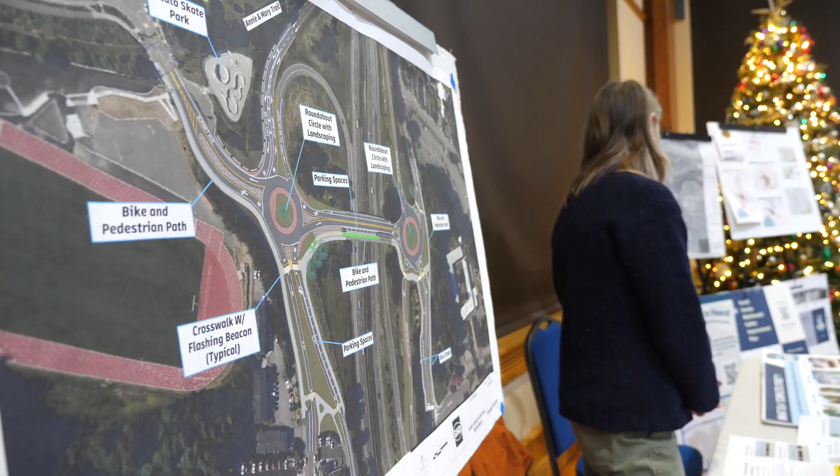So, I have a couple of quick questions. How many of you are on one of the events this week? Right, that's a really good number. And how many of you took part in the original set of walking audits? It's about 18 months ago. Wow, this is pretty amazing. I may just have you guys come up and present.

This is pretty good. We're putting together a set of presentations to build the vocabulary. We're finding that Humboldt County residents are really among the more knowledgeable. So we're starting at a higher level than we would normally think, but we want to make sure you have the right grounding, the right base. So I'm going to start a little bit just to get some thoughts flowing about why we do what we do.

And then I'm going to make it much easier for our recorder. I'm going to step back here. Is that better for you? Cool. Okay, thanks. Oh no, I'm going backward. I need to go this. You already taught me which button to push. That's half of life, is learning which button to push.

Portland is now building bridges just for transit, walking, and bicycling, no cars. It's giving direct feed into the neighborhood. It's connecting really important parts of its neighborhood, and it's resulting in some amazing numbers of people who are now not only living and working in these zones, but now just coming to enjoy the whole pleasure of being a resident of Portland.

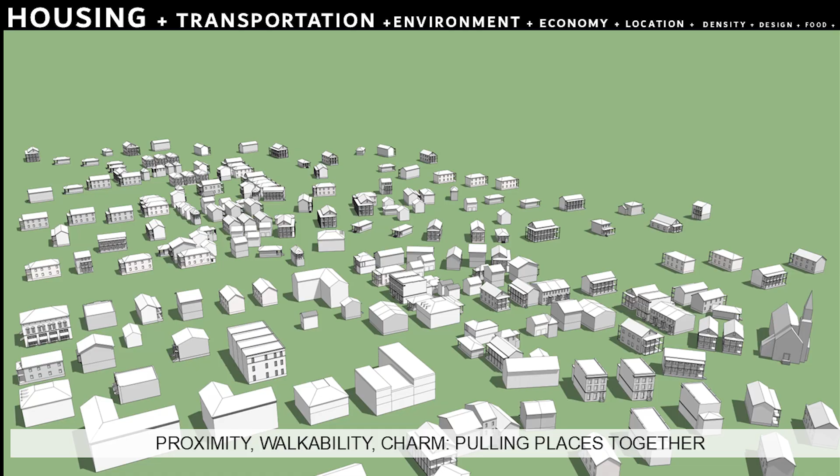And we need less of the land, we need to displace less of the forest or less of the farmland in order to accommodate population change. If we could deliberately learn to get together in communities and get those city comforts or town comforts that I was talking about, to do that, we also want to make sure we still have our privacy. We still have private outdoor open space, and we still have long views across green, things like that. That all comes from getting the design right.

The design that's most important is street design. It took me a long time to realize this, but that's why we ended up writing the book. John Massengale and I came to the conclusion that street design was the one thing we could least afford to get wrong. And yet it was the one thing most often gotten wrong in the construction of our modern built environment. And so we set out to put down all these thoughts we'd had over the previous 20 years or so about street design in this big fat book.

And we thought, well, that'll be easy. We've done this for a long time. We've thought about it. We learned from Dan Burden. We'll knock this out by Christmas. And it took us 3.5 more Christmases to get it finished.

But in the process of creating the book, we traveled all around. We went back to places we had visited before, or that we knew as students, or ones we had read about. We went to places that our colleagues and friends recommended we check out, and we measured them. We photographed them. We watched them at different times of day and different days of the week to see how they perform. And we put all that in a book.

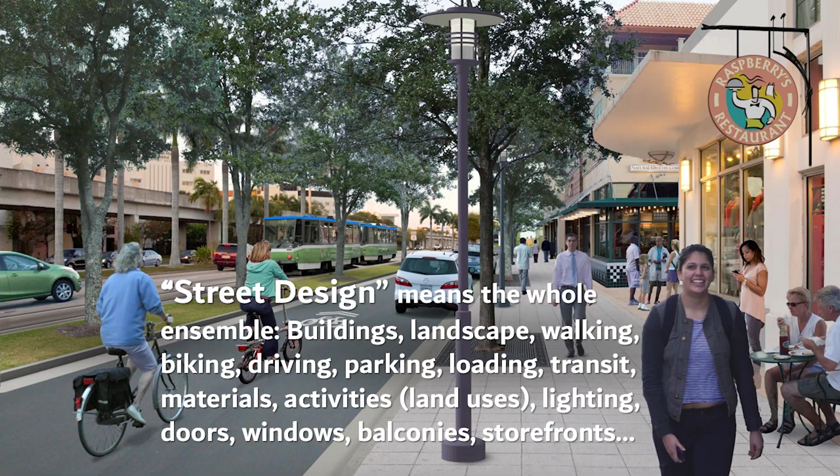Now, where do you do that? Well, actually, we have a lot of places we can do that where the spaces we've inherited seem built out. I've heard that phrase 5 times this week. Well, you know, in Humboldt County, we're largely built out. In McKinleyville, we're largely built out. In Arcata, we're a built out town. I heard it over and over and over this week.

I know this is going to sound like the crazy carpetbagger from Coral Gables coming in and dropping his opinions, but here's mine. You're not built out. In fact, much change will occur during the coming decades. In 50 years, 50% of the buildings you see on the ground will have been built within that 50 years, even if they replace ones that are already there. That's the challenge ahead of you. So you're not built out. And with all that lost space between buildings, you have room to grow and build your way out of your problems. Now, that's going to require a bigger menu of street types.

For a long time, traffic engineers were trained to believe in only 3 categories of streets. Local, collector, and arterial. Arterial, collector, local, ACL, sounds like a knee injury, right? And then of course 2 contexts. As the book famously said for 50 years, rural, by which they meant suburban, and urbanizing, by which they also meant suburban. Sorry, only really one context. And so when they applied those rule books to the arterials and collectors and locals, this is the kind of space they created in front of your house, or your neighborhood, or your commerce. All of it designed with the idea that wider and faster roads were better roads, which was wrong.

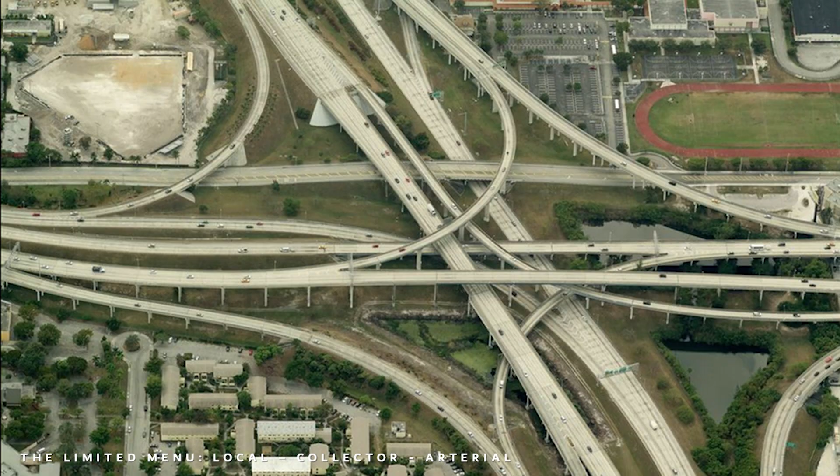And here's the key to it. Now this is a bumper sticker, so you can remember this. LU1, TR2. Learned this from Rick Hall, one of our colleagues, and the Dean of Modern American Traffic Engineers. Rick says, a community should do its land use and establish its vision, think about its urban design pattern. In other words, determine what it wants to be when it grows up. And then design the transportation facilities to fit that vision, not the other way around.

What's happened all over the Sun Belt during the last 60 years or so is that we've been just designing the transportation systems first, however traumatically, with the disruption that comes from road widenings and highway building, crashing through historic neighborhoods with interstates and all the things that you've seen.

And then wait for the communities to figure out how to adapt around them. That's been the world we've lived in. Now, how can they get away with that? It's because transportation actually is where the money is. Of course, the motoring public wants its leaders to get things done. You know, something ought to be done about road X or road Y. And so something usually is. Unfortunately, they're not always improvements, even though they always use the word improvement to describe them.

Now, because they have the money, when we're planning, we should really let land use and urban design lead and let transportation follow. But when we're implementing, we need to use that treasury to let transportation lead on implementation. But if you do it in the opposite order, if you start with the idea that everybody's going to make a trip in a car by themselves every time, every day, for everything, then don't be surprised when you end up with a place you don't love as much.

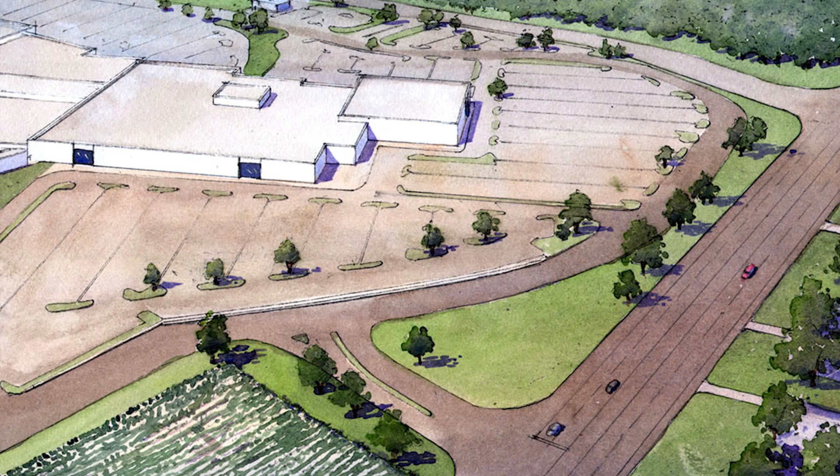We can also use this approach toward retrofitting suburbia, changing the places that are graying out, like the old shopping centers as they're aging none too gracefully, and we need to think about how they might be replaced.

That actually is one of our best sources of room to accommodate growth as it occurs, however slowly or rapidly. Recapturing the lost space. We can add housing variety, we can still have retailing, maybe not quite as much. We can make workplaces and good places to work from home because you can walk down the street to that coffee shop.

Now, streets sending messages do a lot of powerful things. They tell you where you are. This is Pacific Grove, down in Monterey County. And if you stand on that street in Pacific Grove and you look west, your brain just tells you that where the sky comes all the way down to the railing, that's the ocean. You can't see the water there, but you know that's the overlook of the ocean. So even if you live several blocks from the water's edge, you are connected to it. You feel connected to the ocean in Pacific Grove.

Streets tell us when we are. You step out of a building like the one we're in, the street greets you, gives you information. What time of day it is, what time of the year it is, and streets change in order to send you those messages. And of course, they send you messages about the institutions. This is in Yellow Springs, Ohio. What's this? A terminated vista. Right? Okay. Horace Mann built that building.

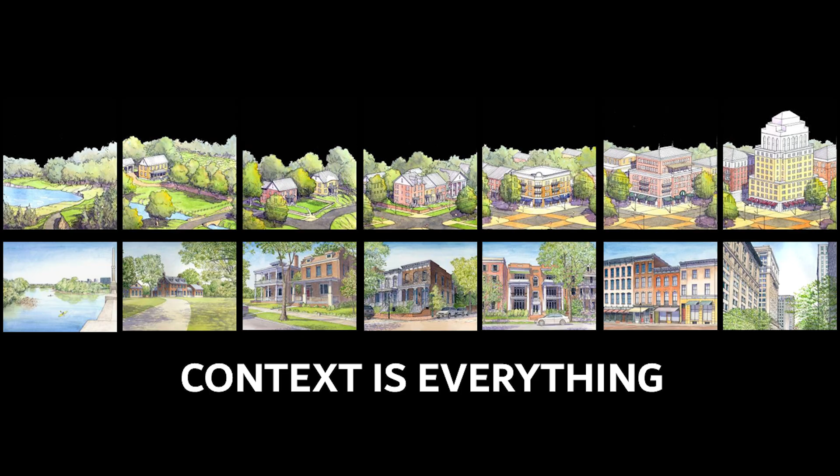Context is really important. So if we're designing in the heart of the city, we shouldn't use details that were designed for the automotive-dominated suburb, right? So the corner turning radii, the lane width stuff, all those details are inappropriate to shoehorn in on top of your historic cities. Now, by the time I get to about here in any presentation, someone says, "But Victor, we're not Amsterdam." But Victor, we're not Amsterdam. Well done.

Now, we need a big menu. We need streets that are like parkways. We need main streets. We need skinny streets that are low car or no car. We need step streets and passageways. We need mid-block walkways that take us between where we are right this second and where we need to be, like maybe where our car is parked. Why not have that contribute to the experience instead of subtracting? We need canal streets. This is an important detail in retrofitting to adapt to climate change and sea level rise.

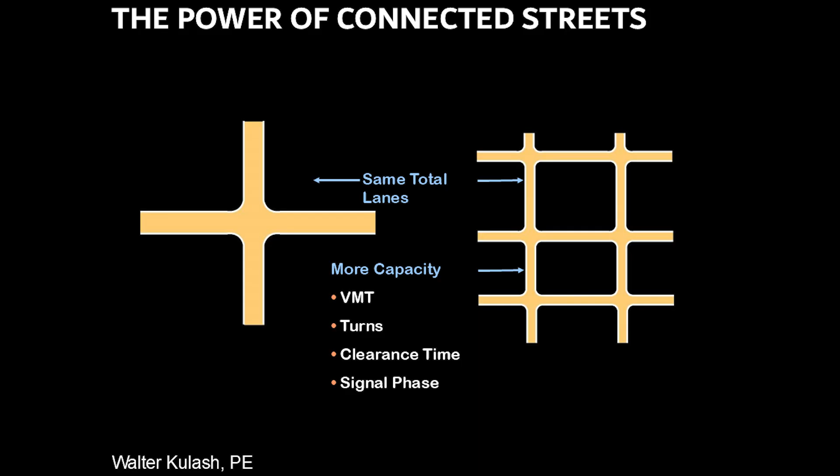And so if this had the same number of lanes in both of these diagrams, two lanes in each direction, the capacity of the system on the right for accommodating trips of all kinds, including car trips, is much, much greater.

My friend Angie Schmitt wrote a great book called Right of Way, it's an analysis of race and class and the terrible epidemic of injuries in America's streets. You should read that. Angie said driving should be a privilege and walking should be a right. Somehow we've gotten it backwards.

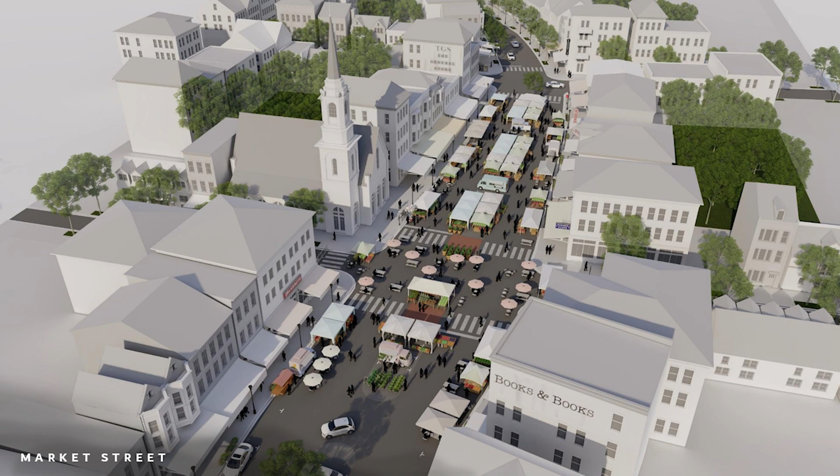So if we only have arterials, collectors, and locals, we have too limited a menu. Like in Jaws, they said we're going to need a bigger boat. We need a bigger menu. And that menu will include reintroducing some street types that have been forgotten, like market streets and village streets. Here's a street that's based on the examples in the villages of the Cotswolds.

But I forgot it had sound effects. Yes, there are birds.

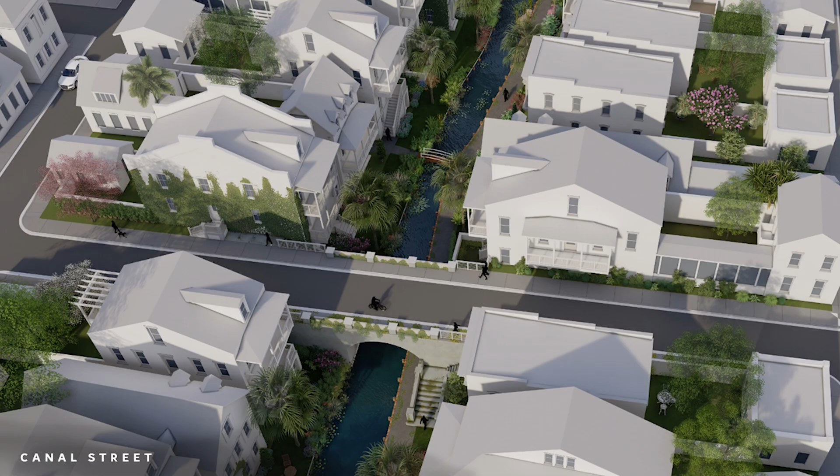And here's a canal street. This is actually a real street that was constructed in a neighborhood we designed in South Carolina a while ago. And they were going to put a pipe between these two lakes to level out a stormwater issue. And we said, well, what if we have a canal instead? And we turn the houses around, we face them toward that space and put a walkway. And now that's the most desirable part of the neighborhood. And it started off as the center of the land where it was most featureless and with the least interesting views. So that was a good move.

So the longer menu is something we bring up in the new version of the street design book called the Catalog of Essential Street Types. We've named 10, there are probably more. And then we illustrated in the book 27 variations on those 10. So you don't have to wait for the book to come out, although it's coming out really soon. You can read about those or see pictures of them in videos like the one I showed you on street.design. That's the website, street.design.

What are we doing all this for? We're to improve people's lives and unleash human ingenuity and creativity. That's why we're building the built environment. Thank you very much.

I'm going to give you a final prescription, Dan. Here it is. In new development, grow compact, complete, connected, traditional neighborhoods. And where you are working on your historic places, respect their patterns and don't shoehorn suburbia onto them. And then where you are retrofitting sprawl, do so with vigor. There's lots of progress to be made. Thank you.

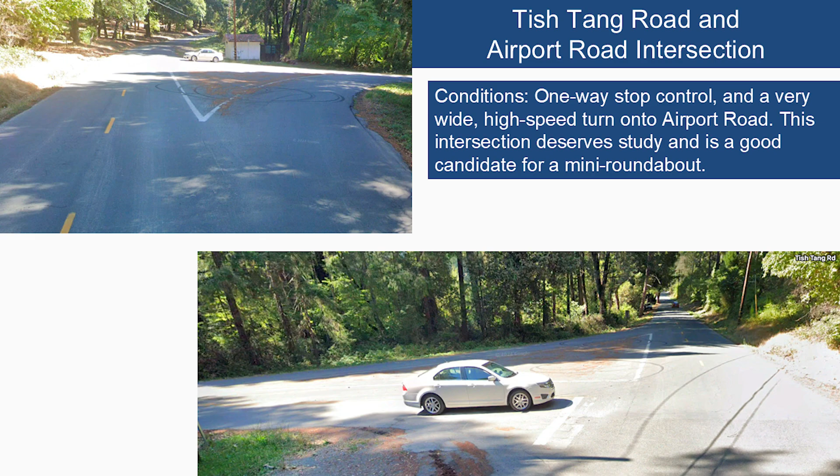So we looked at this. This might be a good location for a mini roundabout, which means it's flat on top or nearly flat, and it will handle any size vehicle and yet bring down the speed of traffic. So when we look at the roundabouts, take a look. I mean, it is so wide that one of our sponsors parked his car in the middle of the intersection. I've never seen that before.

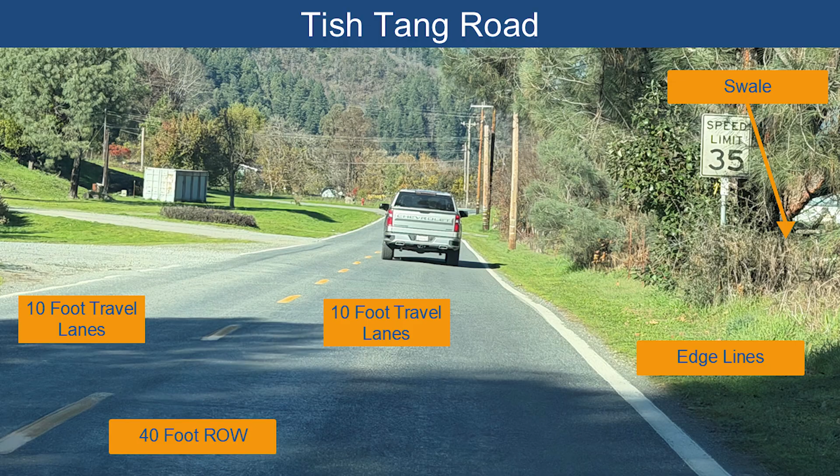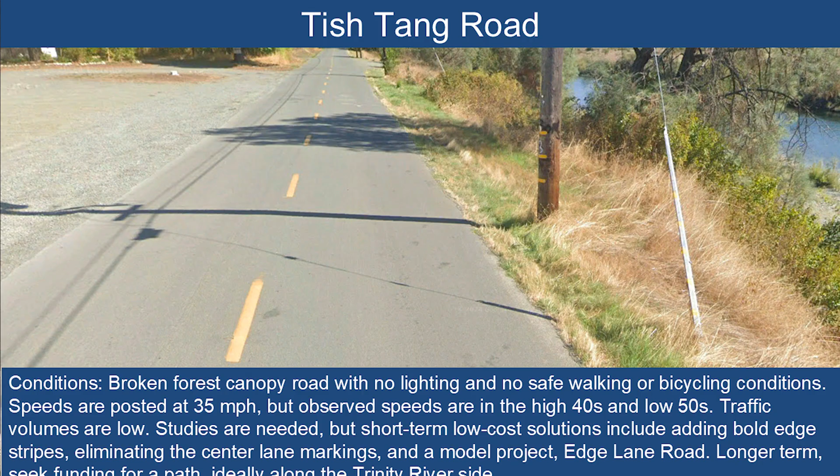Then we got to Tish Tang Road further down, and again, two 10-foot lanes, but a 40-foot right-of-way. Here it looks like putting in a pathway would work. So we're looking at a variety of short-term solutions and longer-term solutions. Arcata was next, and Netra, thank you for arranging such a wonderful group of folks. And I'm recognizing faces right now, those of you who joined us. But we learned a lot about what the challenges are, and we had a person who had visual impairment join us, which was marvelous. She was an excellent teacher for us.

So these are just some other examples. These are all California examples. Landscaping, and even people driving in are going to feel a little more welcome when they get out of their cars and they can walk the rest of the way in. So McKinleyville, we didn't take walking audits there, but we had a set of meetings that were wonderful. The challenge today is certainly getting across the street. We have a few treatments that we like, but again, I'm going to show you, these can be enhanced.

And then I blanked out on the name of the street. Hiller. Yeah, Hiller. These treatments are very important, very needed, but there are better candlesticks or other treatments that can not only be more attractive, but wouldn't be taken out by the motorists, right? But it's already being used. We're very pleased that this connector is being made. Ended up in the wrong place. I'm sorry, this is not supposed to be. Okay, now into Eureka.

And again, a wonderful gathering of folks who joined us, including another woman who has visual impairment issues. She was out in front of all of us. I was pretty impressed. Anybody know her name? Taya Gas. Thank you. But the city engineer, planners joined us and laid out a very good walking route for us. We got into the neighborhood as well as along the commercial district.

What I want to say is every one of these taught us as observers a lot of opportunities. Things are doing really well. And then other things that I'm now going to show you some of the tools that we can further enhance. I love your raised intersections and the nice tight corner radii and beautiful homes. This is an amazing neighborhood, diverse housing.

But one thing you're doing really well, and I think that's true in not only Eureka, but also Arcata. Most areas we visited, you're doing really good curb extensions. These are really well done. But in the same neighborhood, we found where, as Josh was driving, we couldn't inch forward enough to where we could see the traffic. It was coming down the street at a pretty high rate. So there are places where you really need those curb extensions to make the road much safer.

Now, the second part of my presentation, I'm going to get into the core ways to make improvements. One would be better connectivity. Now, this is a Florida thing, but notice they have sidewalks, they got some trees, but if you wanted to go to the stores that are right behind your home, there's no way to get there without a 15-minute drive each way. And all they would have had to do is plan a little connector in.

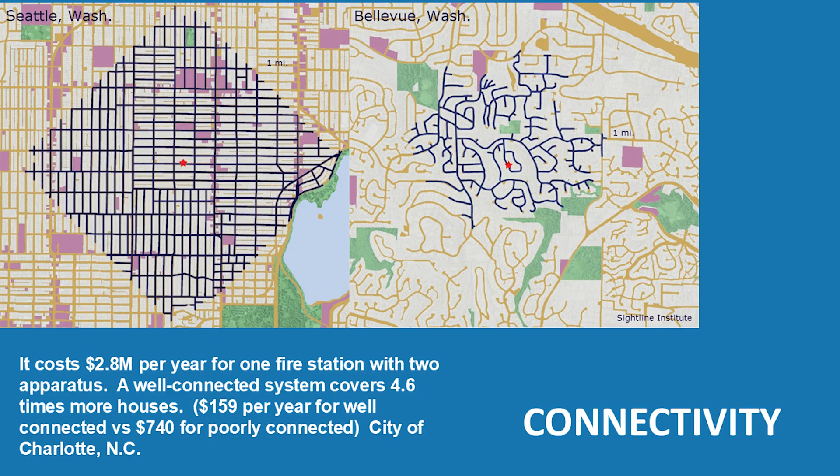But people still aren't walking, and why? Nobody there. The buildings are misbehaving. And until you get the buildings to address the street, as Victor shares with us, then truly you're not going to get the levels of walking, biking, and socializing that you really need. So it all comes together by getting your code right.

So I really want to focus on speed control. Almost everywhere we visited, and all the topics I think you're going to want in your neighborhoods or where you go shop or work and play, speed is the first thing and the most important thing to address. So I'm going to show you the tools.

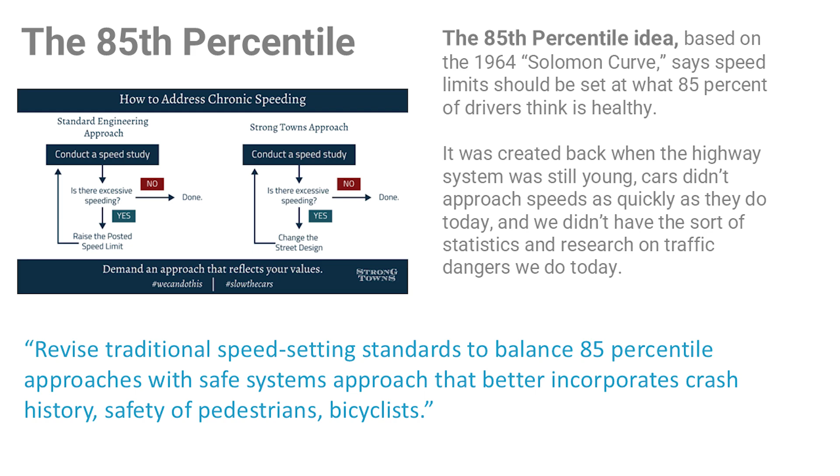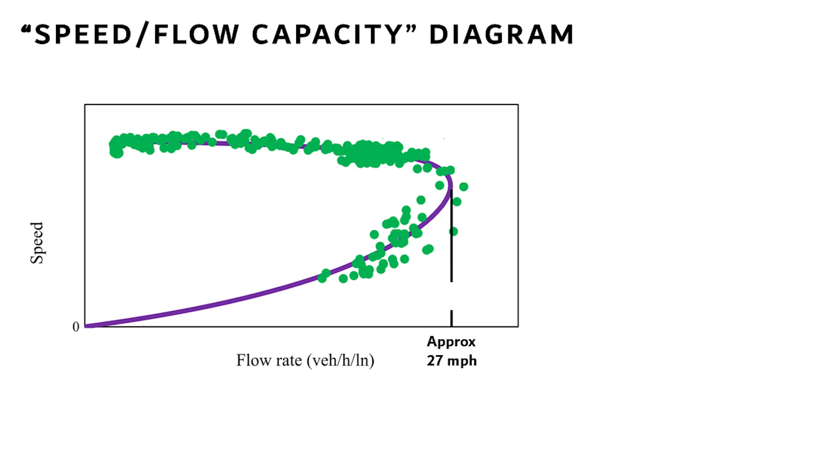The next very important piece of information is the speed at which you get the very highest capacity. That is, the greatest number of cars can move. What speed is that? 27 miles an hour. Above 27, you're not able to hold the same capacity. It's dropping, and the faster, the more it will drop. So we shouldn't post any street above 30. Really shouldn't. And if we want even more capacity, we shouldn't post them above 25, right? So this is going to be very important with what I show you.

I think everybody is aware of this, the kinetic effect of speed: as you go up in small increments, the number of injuries and the fatalities and the seriousness of injuries goes up dramatically. It's not just a linear progression. So ideally, on a street where you would want to live, you wouldn't want people driving more than 20. There's a lot more noise, a lot more problems all the way around.

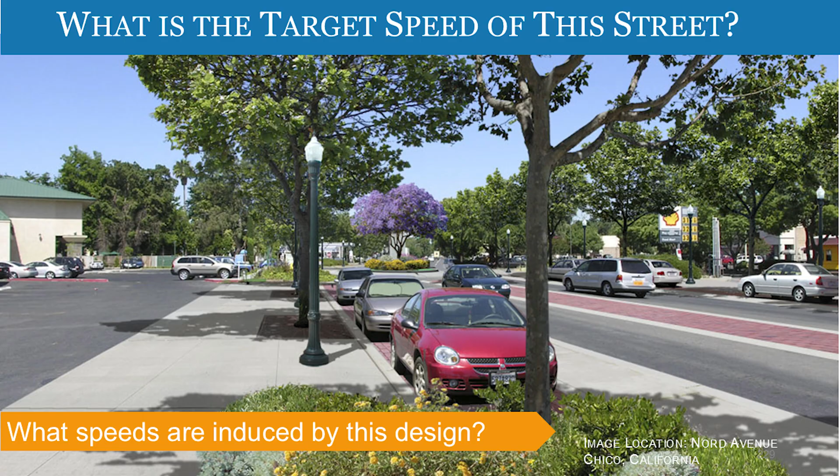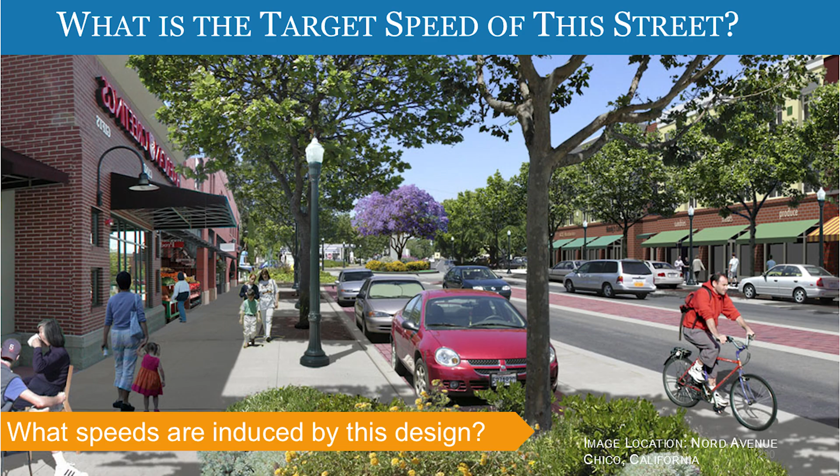You terminate the vista. And so now the planner, the engineer have done everything that rules allow them to do. And now the developer comes in because you set the right stage that they can now build buildings that are going to pencil out. And I can guarantee you now the speeds are going to be looking-for-a-parking-space speed, right? So maybe 15, maybe 19. But it's each component that helps bring the speeds down to the right level.

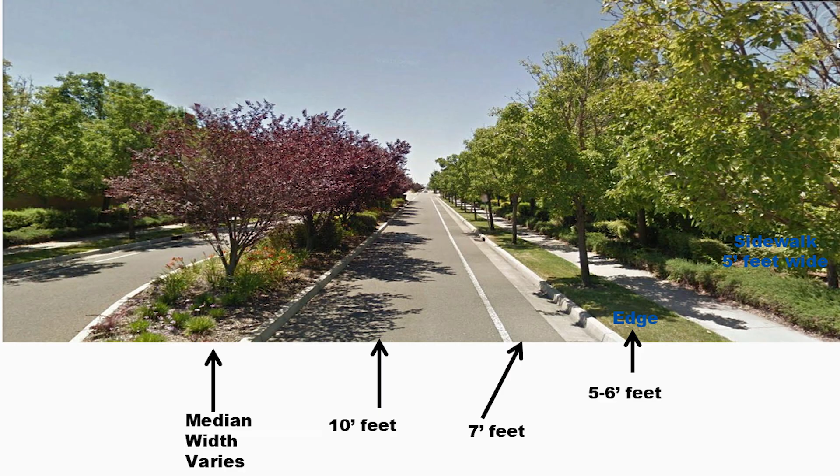Now you go up to a collector category street, and now the tools that are going to help hold down the speed would be building a triple canopy, again the beauty, bringing nature back to the streets, and then having a little buffer to the planter strip, and then the sidewalk set back behind the trees, right? So what are the walkability tools of the street again?

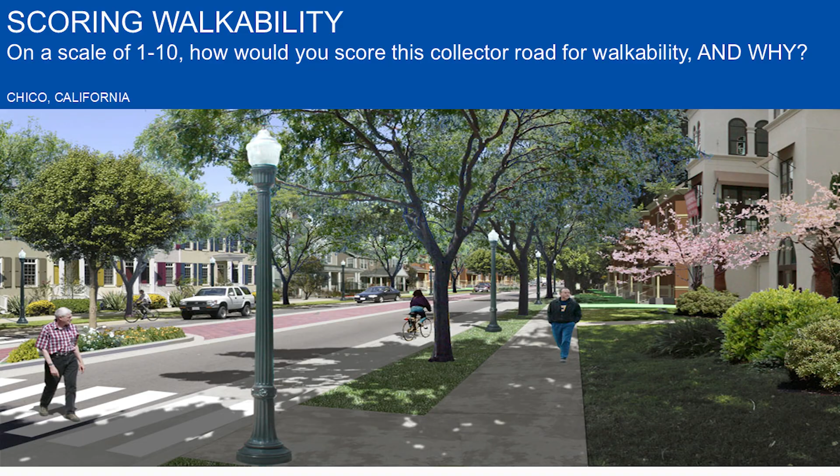Nord Avenue, and this is what we planned for. Notice again, we've set the sidewalk back, we've got the planter strip, the bike lane, and we even colorized the centermost lane. And this will hold the speed down to about 25, because it has an important role.

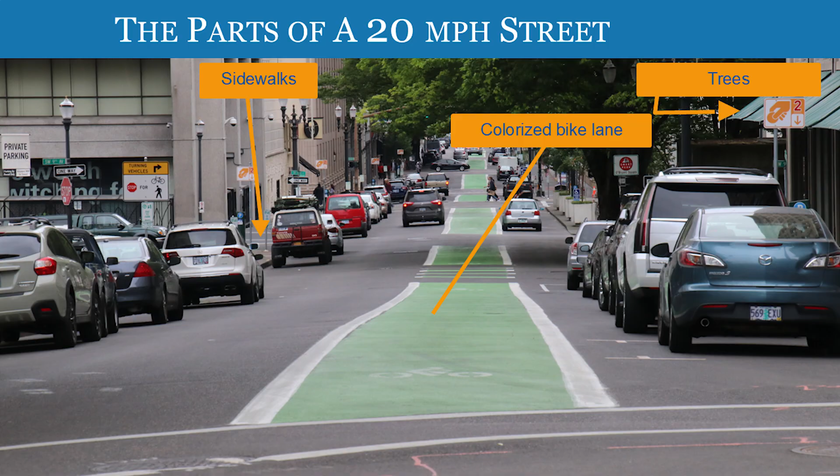We can also colorize the bike lane, as you see here, which makes the road feel tighter, feel narrower, so that people drive at a safer speed.

The newest street in my town, Port Townsend, Washington, which I helped design, I feel really good about. I've never seen anyone driving more than 25 on this street ever since it was built. It's about 2 miles long. And we have 4 raised crossings.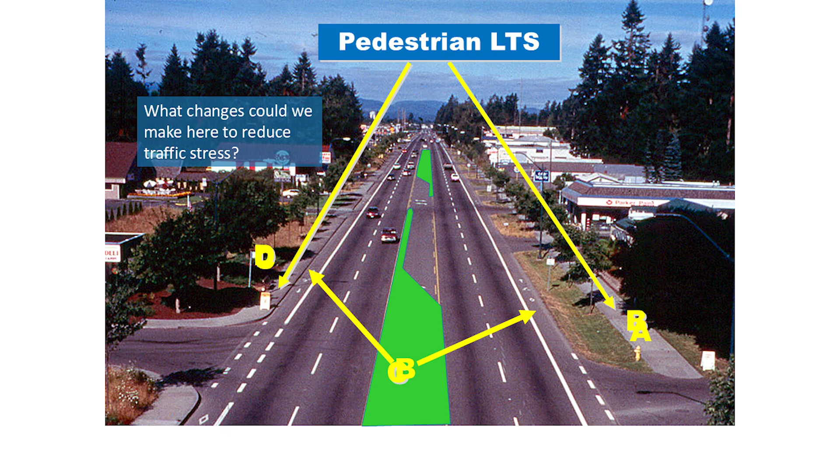In fact, if you put in a raised median on one road that we built, it brought down crashes 80%. Think about that. Just that median is probably the most powerful tool you can put in. And then, of course, you can put in trees and control the maneuvers of vehicles.

I also like to break down in a commercial district the parts of the sidewalk. The first 2 feet out from the building edge, people are not going to walk, right? They're not even going to stand there, but you can still use that space. And then the furniture zone, if it's correctly lined up, it's very distinct. What that leaves is a space in the middle for the walking and the talking, right?

Intersection tools, very, very important. This is where most crashes occur. For motors, for pedestrians and bicyclists, very high crash rates. These are the tools that I really like to see, and you're doing a number of your intersections this well, but I'm going to show you some that I think are done exceptionally well. This would be like nirvana.

It's a protected intersection, and in this case, look how tight and short the crossings are. And the speeds are low because the road reads you should only be going through this at 15, maybe 20 miles per hour, and yet it works for every size vehicle. It's pretty amazing. So these are the tools, the short, median noses, right?

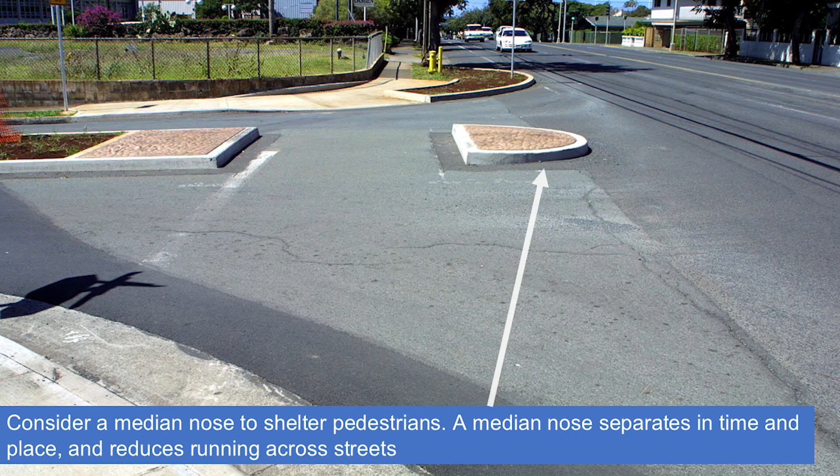Here's a wonderful short median. And again, look how comfortable the walking would be. The treatment is quite good. You can then landscape these. And with the landscaping, they're far more noticeable. And motorists will start to slow down sometimes several hundred feet out because they see the obstacle in the street, as opposed to just some pure concrete form.

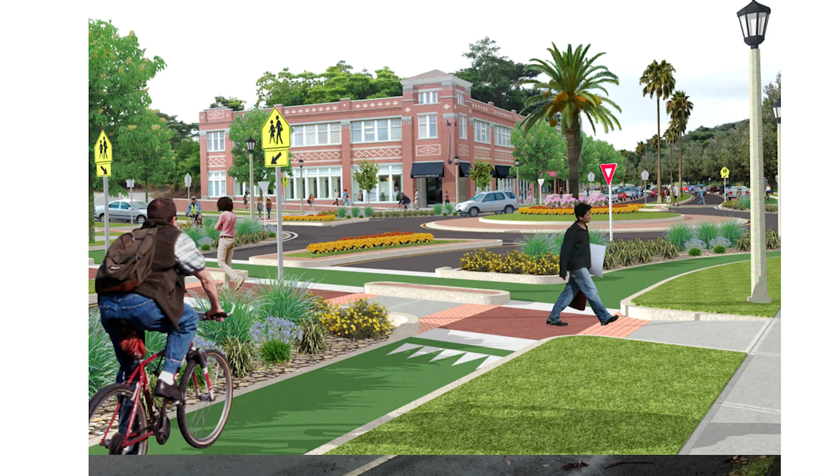In Maui, we were asked to do an overpass for the pedestrian. In general, pedestrians do not do that quarter mile up, over, down. They'll just go ahead and cross the street. So we said we think we can do a much better job cheaper. And so this is what we proposed. And again, it's a protected intersection. And the motors come in at a much lower speed, and they yield very high yielding to pedestrians or bicyclists.

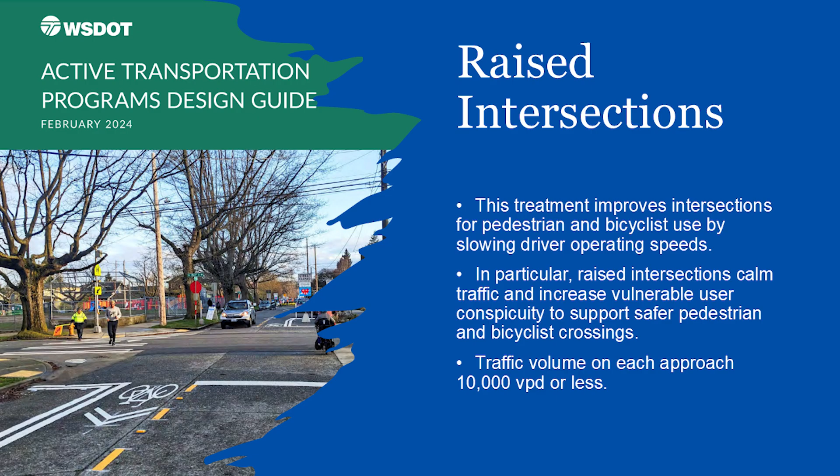A little bit of a pitch for roundabouts. Roundabouts are the safest form of intersection you can build, by far. And this is why the standard intersection, whether it's a four-way stop or a signal, is going to have this number of conflicts. And this is just a 2x2. So 32 vehicle-vehicle conflicts, all shown in red, and then 24 vehicle-to-pedestrian conflicts. This is more than most humans can deal with.

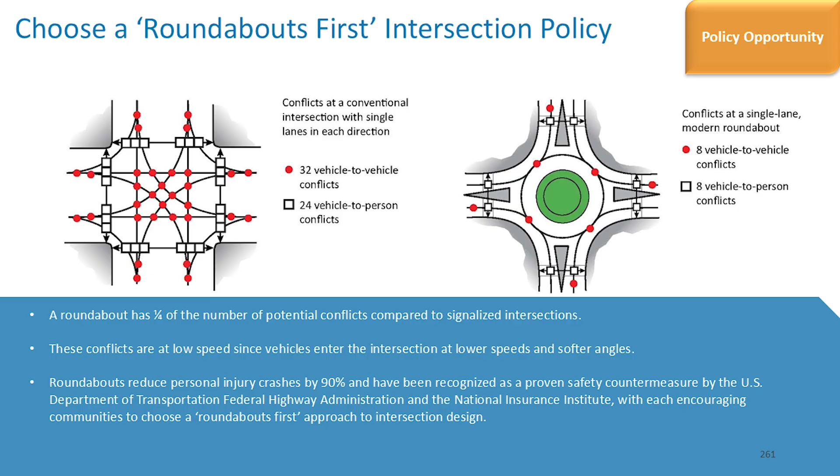It really is. And so a roundabout only has a total of 8 conflicts, and they're all at low speed. That's the big difference between the two. So 6 conflicts per leg. If you leave out a crosswalk marking and you're forcing a person to go 3 intersection legs, then they're dealing with 18 conflicts when they really should only be dealing with 6. Right?

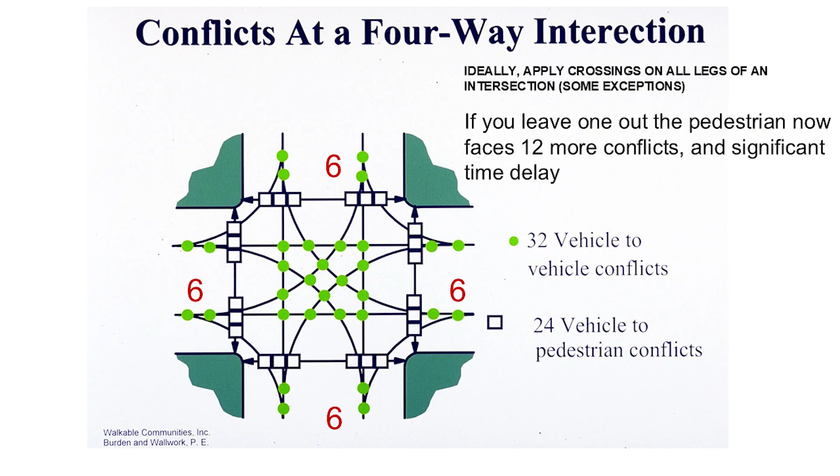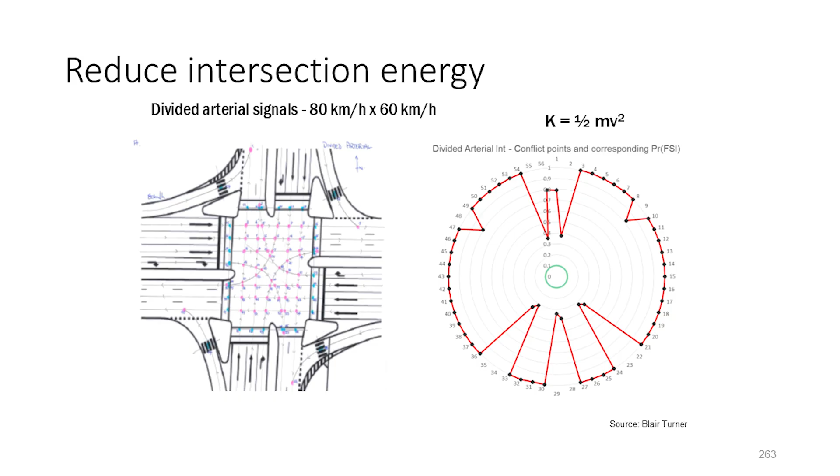But here's the cool thing, that if you have a standard intersection, this is the kinetic energy. This is what does the damage to the car and to a human body. This is a huge amount of kinetic energy. And now I'm going to show you a roundabout, the kinetic energy. Isn't that amazing, the difference?

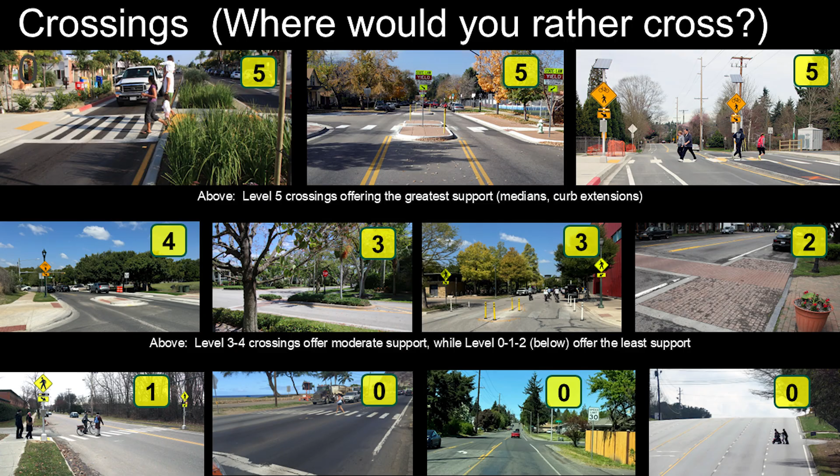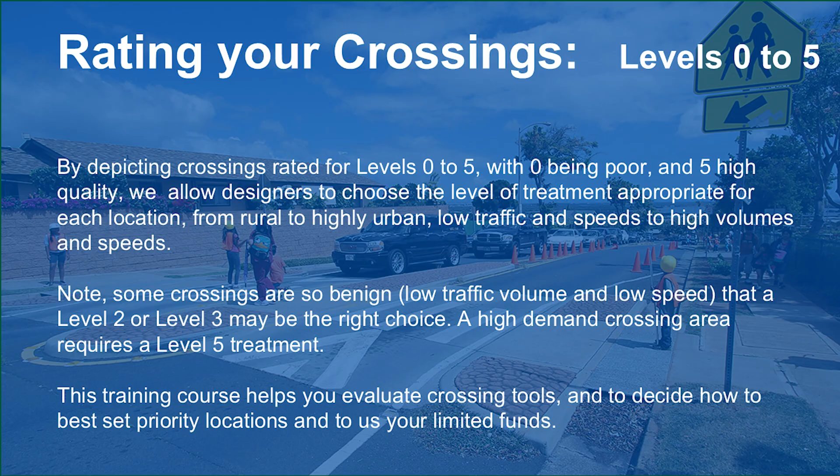So I'm suggesting that there be a methodology to rate your crossings, score them, and then figure out what steps can we take to boost that. This would be like Nirvana. This is a raised crossing. It's at a school. It's got a median, and really brought a lot of higher respect by the motorists to the children.

Another one of my favorites in Tallahassee, Gaines Street. This used to be a 4-lane road. We brought it down to 2 lanes and put a little Z in by forcing the pedestrian to look at the traffic. And also a very safe refuge, so you only deal with one conflict at a time. It's much safer to cross mid-block than at any intersection, because you only have 2 possibilities of a conflict, and if you put a median on them, only one at a time, right? So,

Golden, Colorado, snow country, did a beautiful job with this. Notice that the paved portion, that is the asphalt portion, is only 8 feet wide. They extended the gutter pan and made it, even though it's 14 feet face of curb to face of curb, the motorist only sees 8 feet is for them. And that worked beautifully.

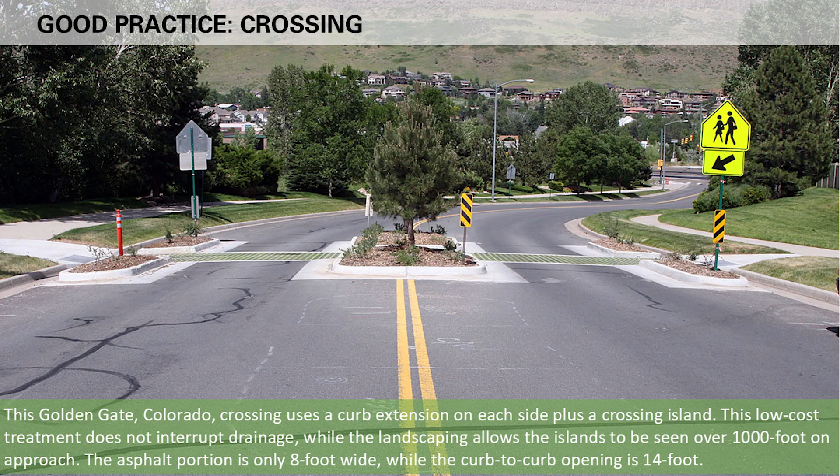And again, really good markings. I think that should become a universal for a collector and above. Always use high emphasis international markings.

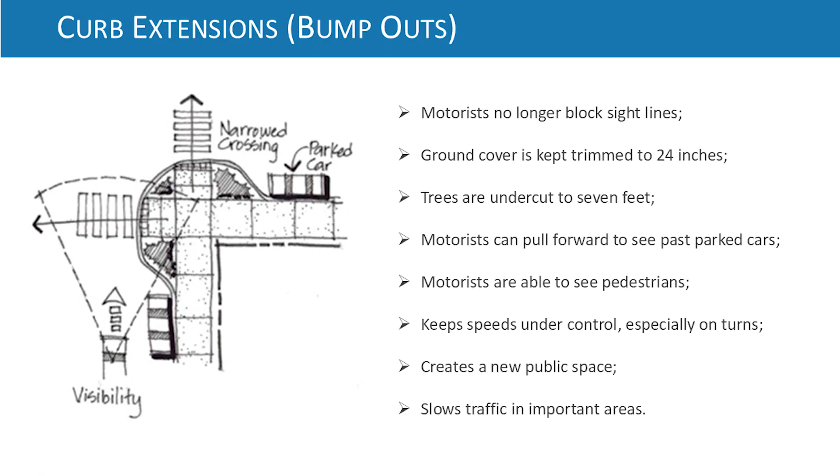Curb extensions are part of the intersection, and I want to emphasize on our walk through Eureka, we had someone say they hate these because we take out a parking space. We didn't take out a parking space. We taught you never park that close to an intersection, right? And so you can see how much shorter it is for a person to cross. Instead of 58 feet, down to 32 feet in this particular case.

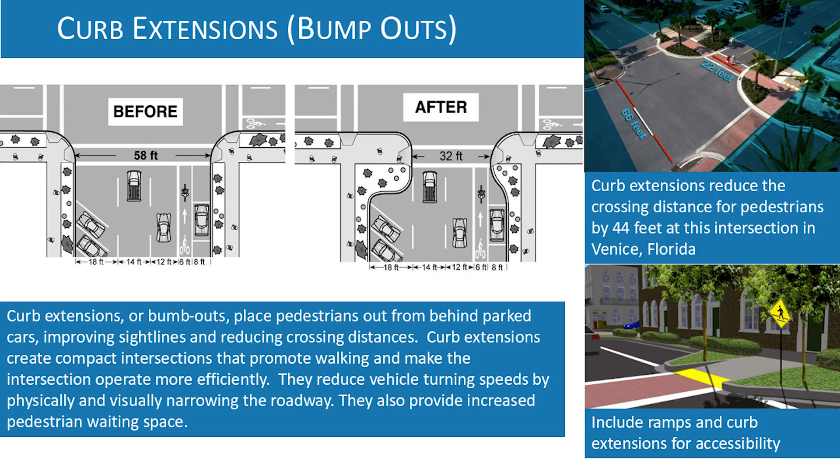And now the pedestrian can see the car, and the motorist can see the pedestrian. So if I were to only introduce one change at an intersection, it would really be to use curb extensions everywhere we can. Wonderful, this particular trail crossing, and again, notice the median, that's the power. In this case, they bring the speeds of the motorists down.

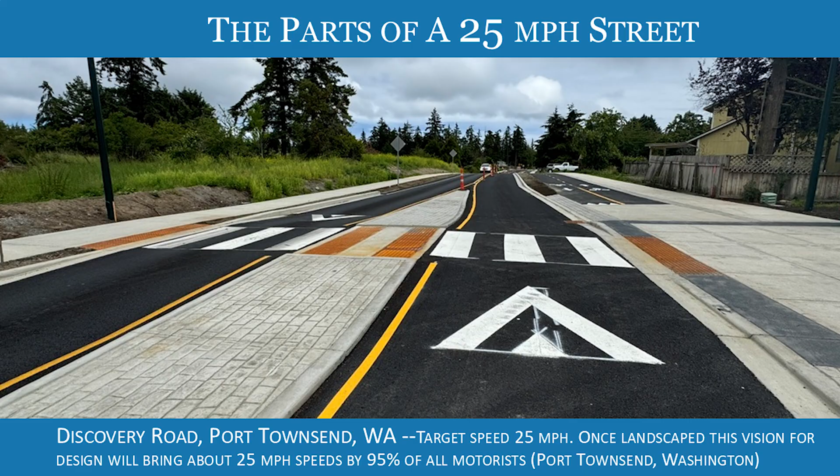A wonderful system. This again gets back to my town, Port Townsend. Just 4 or 5 raised crossings along the street. And truly, it's just a pleasure to drive the street now, where before it was crazy. It really was. You get to higher category roads like this one. You can get some level of a median in with something this low cost, this simple, and it works really well in this location.

Now, half signals. Half signals are a fraction of the cost of a regular signal, and I prefer them personally over the HAWK signals because they're a little bit cheaper and they really work. Seattle now has, I believe it's 32 half signals, and they made a significant reduction in their crashes as a result.

Lane width, real quickly, you're already doing this in most of your communities. 10-foot lanes are wide enough for anything you need to do, certainly as a default. There are cases where you have high bus traffic or high semi traffic, where you might want to give yourself permission to go up to 11, but 10 foot is the safest that we can build. By the way, these lanes are only 9 feet wide.

This is a state road, and this is a freight route through western New York, and the parking bays are only 6 feet. We didn't have enough space to get bike lanes in, so we put in what's called a park assist lane, so that we could get the lanes down to 9 feet. We just colorized this buffer area for a park assist lane. Any way we can to get the speeds down, we are applying.

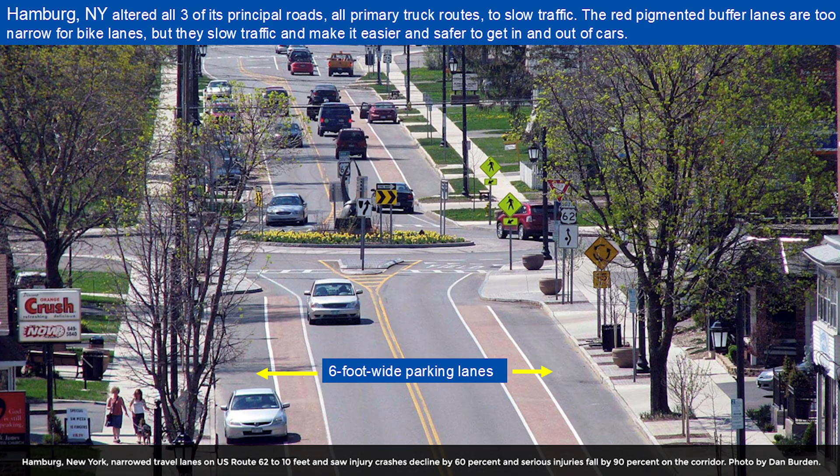Ian Lockwood, an engineer friend of both Victor's and mine, took this 36-foot wide crossing, when it was 3 lanes, and knocked it down to 20 feet. The intersection is now more efficient because pedestrians are out of the street in almost half the time. So you can award the green time to the volume of traffic that needs to be going the other direction.

Real quickly, I want to re-emphasize road diets. There are so many opportunities, and whatever you decide to call it, lane reduction, or what are some other words we use? Well, it is traffic calming, but we're taking away a lane. Lane repurposing. Thank you, I love that. So, when you had 4 lanes, you had times where motorists were turning left, but when you have 2 lanes, now you have this new 3rd lane. Now the turning motorists are completely out of traffic.

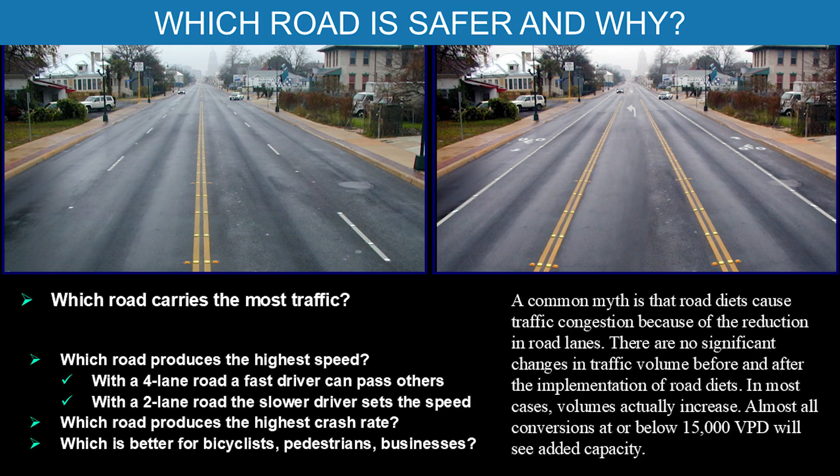So there are many lane reductions that we can do where we're going to improve capacity. The throughput of cars, the delay that the cars experience, are improved, right? We're able to move more cars through that corridor. You see this one they did in Pottstown, Pennsylvania. This is the before, and this is the after. And again, in their case, they were able to award more parking, which helped the downtown businesses.

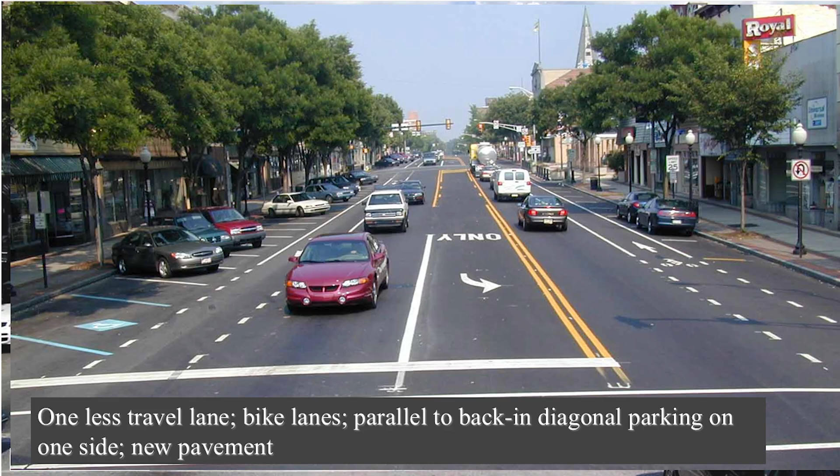This is why lane reductions work. A single lane, just one side of the street, will carry 1,800 vehicles per hour if you don't interrupt it. We only count 10 hours, by the way, and that works out beautifully. So that'd be 18,000 vehicles in a single lane. So a 2-lane road will carry 36,000 until you get to the intersection. At the intersection, lanes cannot be that efficient. So if you fix the intersection, you can move a lot of traffic with just 1 lane in each direction.

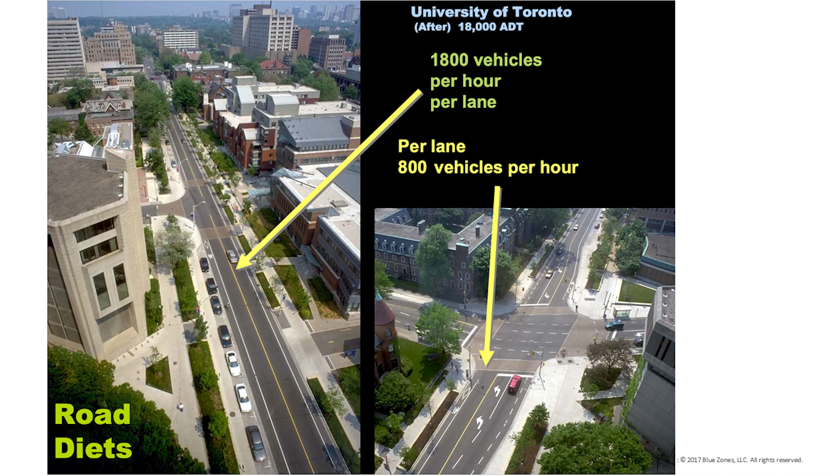They proved that in this town. They had 21,000 cars that were using the road when it was 4 lanes. But it was backing up 3 hours a day. So they said, we can't do any worse. Let's take out 2 lanes and then put in a turn lane. And the traffic started to flow freely. And then they had to shut down a parallel road during construction, so all that traffic came. Now they're up to 29,000 vehicles per day, and the traffic kept flowing because they had taken out the 2 non-essential lanes and put in one that was very essential for the turn movements.

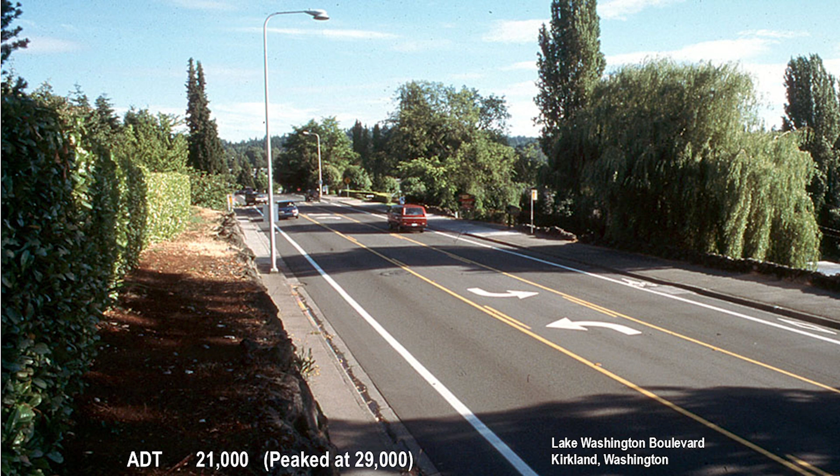I was working in Brighton, Michigan, and we had already talked through that to make this more walkable, we were going to put in a roundabout. But then between my travels there, they were told that the roundabout wouldn't work, that the side street traffic wouldn't get in. And so they bought the signals, and they're actually sitting in the warehouse. They were a week away from installing them.

And while I was in town, I said, you promised me a roundabout. And they said, okay, we'll try the roundabout, but we know it won't work. And they put it in. I went there on peak hour, peak day of the year, and from the side street, with them observing, I was able to get in easily within 60 seconds. Now with signals, I couldn't have gotten in that fast, right? So it's amazing what a roundabout will do, 30 to 50% more capacity per lane.

For safety reasons, this is a very important street. We had 4 lanes, and we needed to rebuild it because they were taking out pedestrians, the workers in the city. And so we got this built, but in order to do it, we had to put in a roundabout at the street down below.

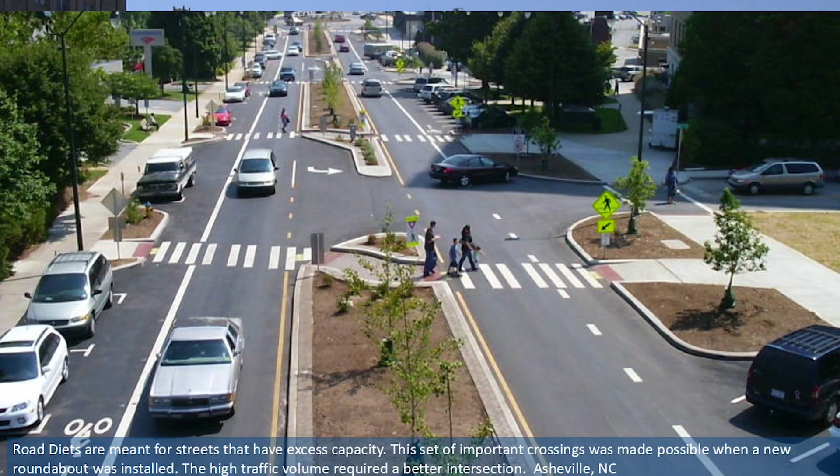I'm almost finished, folks. So we say that you can take the lanes out easily for any road, 12,000 or 15,000 even. But after that, you really need to have a lot of science and a lot of additional tools in order to make it work. And so we recommend that if you go up to 18,000 vehicles per day, that you do this study. But Seattle now is clear up to 31,000 for 2-lane roads.

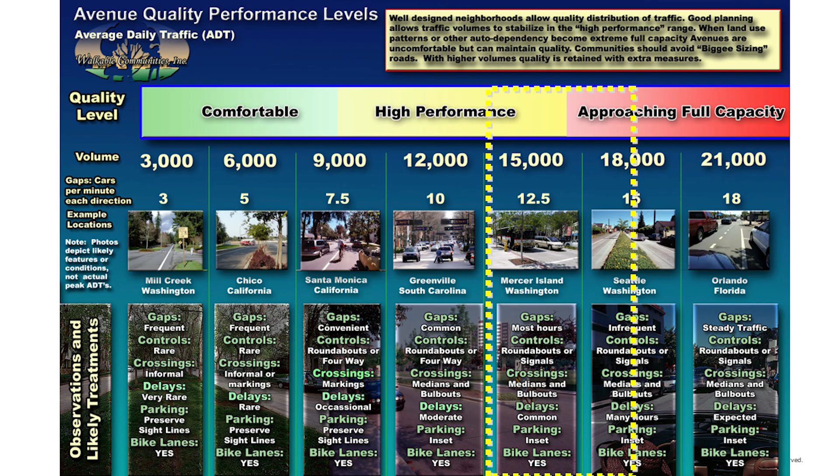And I'm wanting to close out on one last topic. Sometimes developers feel that they need 4 lanes just to say you've arrived, this is an important place. But in this wonderful town, Castle Rock, Colorado, they put in 4 lanes, but then they immediately put in buffered bike lanes until someday, if they ever have the capacity need, they'll be able to put in the added 2 lanes. And I've gone back several times, they'll never need the extra lanes. So quite often, you can do more.